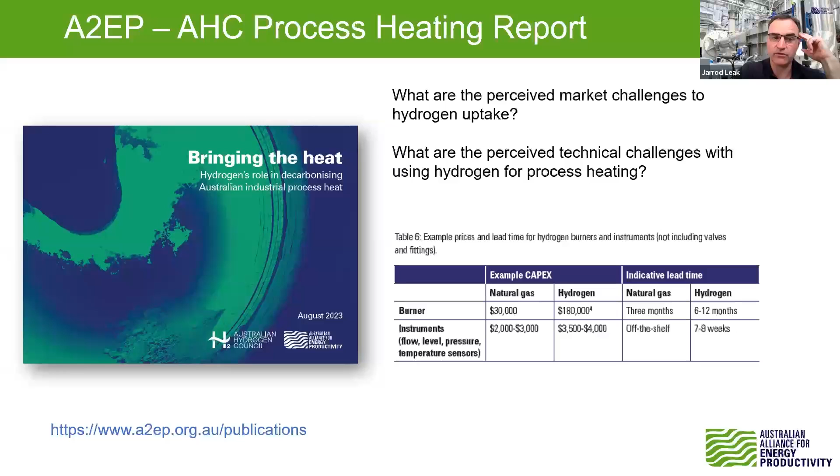One of the first things that came clear was that the costs for using and burning hydrogen are certainly higher with the equipment. In some cases, for some instrumentation, it literally needs to be gold plated to stop that hydrogen leaking into or escaping from the pipework. So there's certainly much higher costs coming when you need to look at burning hydrogen. We've summarised a few of the different extra costs for like-for-like cases - that's just one of the many tables and insights you'll find in that report. You can download that report from our publications area on our website.

In terms of an overarching theme that continued to come through, most of industry is preferring electrification and/or biomass or biogas.

Hydrogen is not coming into much strategic planning, largely due to the uncertainty of supply and cost. On the supply side, how is that going to be stored and produced all year round? On the cost side, while the long-term guide is maybe $2 per kilo, what is that in the short term, and how much is that going to fluctuate? There's a lot of uncertainty over that cost. So that was the generic picture we got back in terms of feedback.

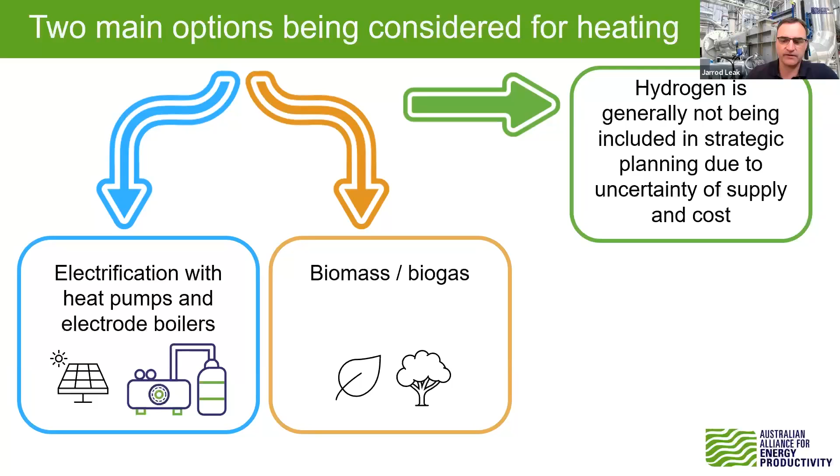This is an extract from the report breaking down the various industries we investigated. If you look at the middle column for hydrogen where it's coloured, you'll see there were not a lot of green lights for hydrogen. Certainly the alumina industry is reviewing that in Queensland to look at using hydrogen for their calcining processes. In some cases, bricks and ceramics have said they're investigating it as one of the possible routes to decarbonise their process heating. Not a lot of others are giving it the due consideration and R&D it probably needs right now, so you see most of the green is for bioenergy and electrification.

There's still quite a few orange spots where R&D is needed, and we definitely saw that through a lot of different areas, like in cement, where they're themselves wondering how they're going to handle this big, long, clear flame that doesn't have the same sort of thermal properties as a natural gas flame.

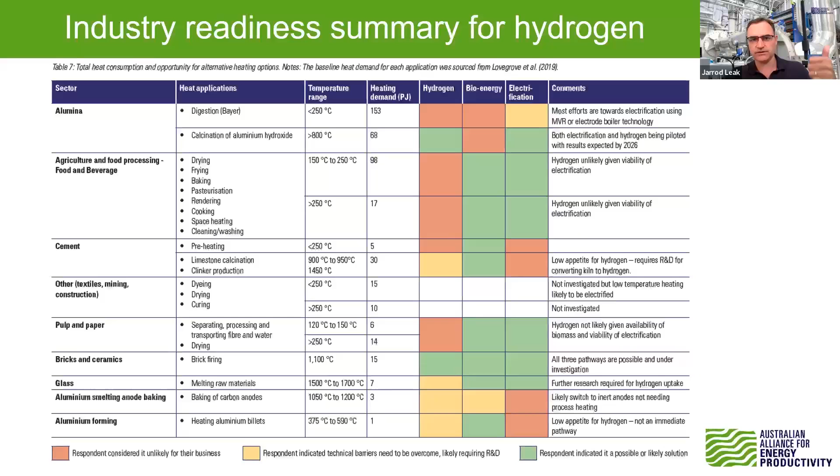So since we've done a lot now in the last 12, 18 months on process heat across electrification, bioenergy and hydrogen, it's led us to a little bit of a model here on where we see things going. Most people online will be energy types and therefore love a Sankey, so this is a quick Sankey we've drawn up utilising data on the left-hand side from the ITP report and from 2019.

Then saying, right, what are some likely trajectories and future heating mixes there? We see, whilst a percentage is achievable with efficiency, most of the work and the heavy lifting, we think, for decarbonising heat over the next 10 to 20 years is certainly in electrification. Heat pumps and MVRs making up a reasonable chunk, and that's why we did the MVR webinar just recently. But also electrode boilers and other things taking up a large chunk of the potential there for heating.

Bioenergy, with current trajectories, we don't see it moving around that much. We've got bagasse being the largest part there, but biogas and biomethane doesn't have the best regulation support - not the greatest trajectory for a big uptake at the moment.

The RACE report that we were involved with identified potential for 350 petajoules of new biomethane and biogas coming into the market, but yet the current regulatory environment, we're saying only 50 or so petajoules being used for process heat at the moment. Hydrogen still a big chunk there, even though our report didn't point towards a lot, but the likes of ammonia and chemicals are certainly likely to be taking up a fair chunk of hydrogen, and certainly even more if we start exporting green iron in the country.

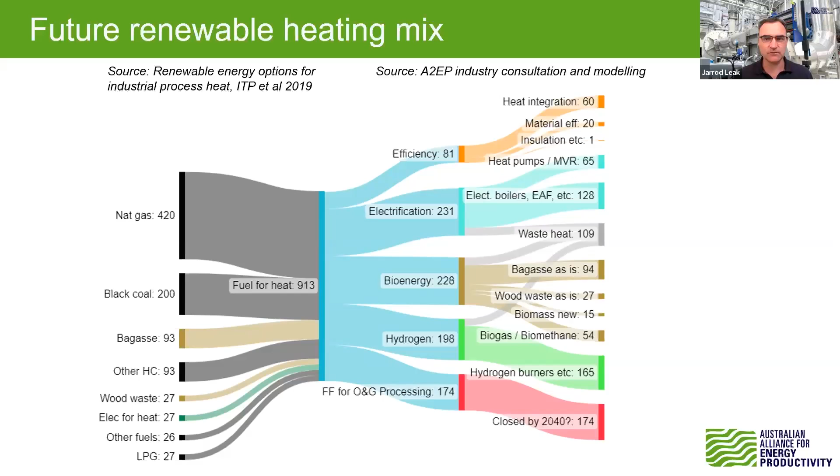We conducted the Australian Heat Pump Roundtable at the end of July, and it was really well subscribed. We invited 30 people and ended up with about 40, so that was nice to have. It was an excellent mix of various governments and government organisations. We had ARENA there, federal and state governments, and some fantastic sponsorship from Mayekawa, RACE for 2030, and AGL to make it happen. A really good picture of what's going on with heat pumps at the moment.

We gave everybody an update of what we see happening in terms of research, and there was a really good discussion around some key issues there.

I thought I'd share a little bit of what came out of that roundtable. We polled the audience on some of the key issues, what they thought were the key issues affecting everybody at the moment, and what would have the biggest impact. These were the main ones, as voted by the participants.

So cross-cutting issues, being standards, regulations, and general awareness, and things like nomenclature - the way we're talking about heat pumps - came up as a really popular one, and we think we're going to do some more work in that area. Followed by optimization of heat pumps, which really comes down to understanding how to best install them.

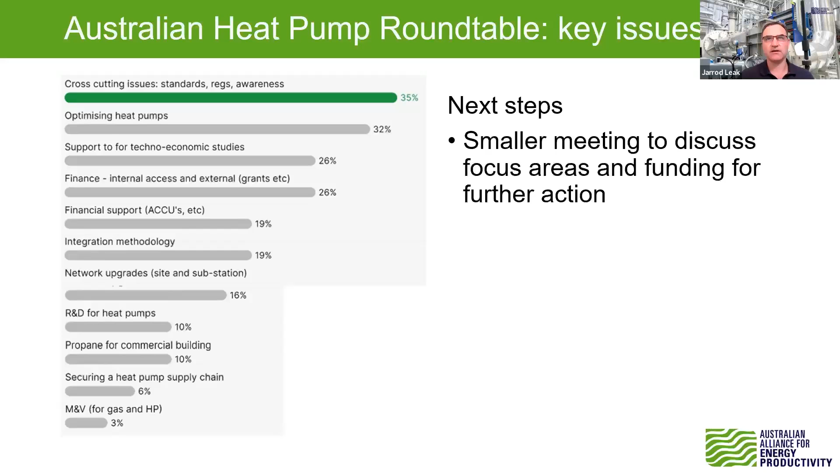That's plenty from me. Let me hand over now to Simon Ray. Simon is a project manager for A2EP for several years now and has run a lot of renewable heating and different modelling projects for us, and done a lot with heat pumps and the like.

We've asked Simon to spearhead this work with the federal government here. It's absolutely crucial with understanding where gas and coal is being used for process heating, an absolutely essential foundation for further planning. Simon, could you take us through that project there?

Thanks, Jarrod. Hello, everyone. So this project is largely based on the success of the Regional Heat Demand Database project by our colleagues over the ditch, the New Zealand Energy Efficiency and Conservation Authority. And in the Australian context, we're working with the Federal Department of Climate Change, Energy, Environment and Water, and they've engaged UTS and A2EP to deliver the first Australian accessible, anonymised and open data set about heat demand.

So it really is an exciting project to be part of, and I think something that will spur a lot of work down the line. Very happy to contribute to this exciting research. The database will map and quantify existing process heat demands to help enable process heat decarbonisation through better planning, fuel switching, and ultimately decision making.

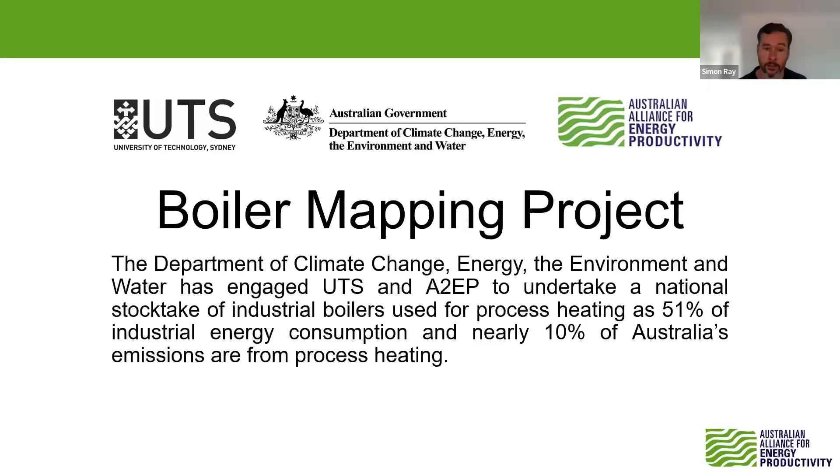So really, that's the summary of the project. At this early stage, we are very early in the development of this project. We're still reaching out to sites. So please feel free to contact me if you have a site that uses, say, greater than 50,000 gigajoules per annum of gas for process heat, or potentially you're a consultant that works with sites that has that kind of level of consumption. Please let me know if you have any comments or questions. I'll be happy to take any.

Thank you, Simon. And your time frame - this project you're putting together, when are we looking at getting something to the federal government, and a bit of a report out there to help others understand what's going on? What's our time frame here?

We're hoping by the end of the year, Jarrod. So it is initial steps, just gathering that kind of list of potential participants, so the companies who have this kind of information - and obviously we respect that information has high privacy concerns with various companies, at the big end of town in terms of their consumption. So we have spent several months developing privacy and data security protocols and management that we've enacted from the very start. Just to emphasize, as well as the publicly available database I mentioned, the high level data will be highly secured and unpublicized. So hopefully that'll start coming in, and we'll be able to provide that report at the early stages of next year.

Good one. And there's a few different areas and people working on this. I will be attending an ARENA event, they call it an A Lab, on the 9th and 10th of October, talking about industrial electrification. And I think some of the data we'll be getting here, I'm sure they would love some of that already to start in their planning and understanding of industrial electrification. So I expect it to feed into lots of different departments and programs. Really important piece of work there, Simon.

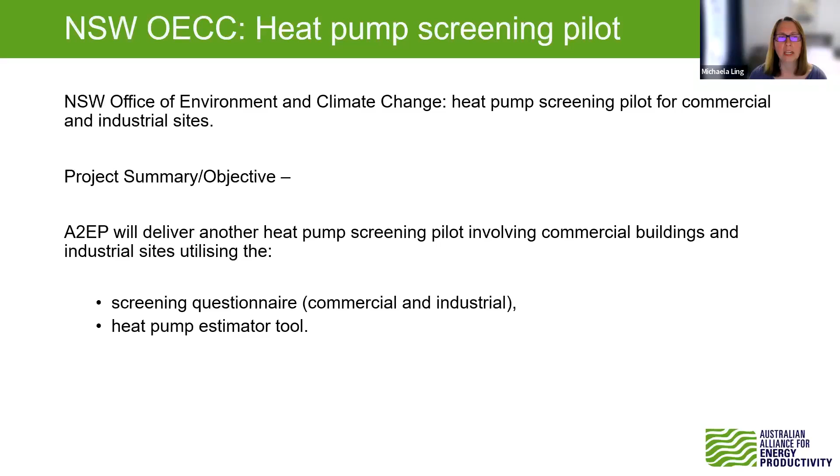Next slide, Jarrod. So basically these tools - a few of you online may have already been involved in the previous pilot that we did, and there are other people on board that I have worked with on previous projects, so happy to get any input from you guys.

But basically the final tool will allow people to go in and, with information on a site such as their energy profile and their current gas use, put some information in and see if heat pumps is something that you should be looking at investing in or approaching to that feasibility study stage.

And this tool also has aspects that allow us to assess the competency of consultants doing the work, as well as the sites, just because it's very easy to have people deliver a feasibility report but maybe not have all the in-house capability to do so, and this is hopefully going to avoid that a little bit moving forward.

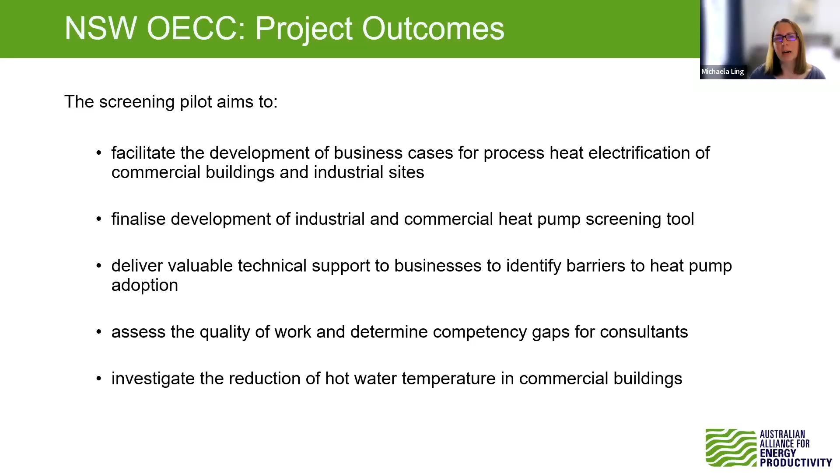And then, other than delivering these tools - basically a screening questionnaire and the heat pump estimator tool - there will also be the potential to do some testing on the reduction of hot water temperature in commercial buildings.

I've just got a slide on that, but basically we're very lucky - Brendan has joined us and has actually done this sort of testing already in his previous work experience. We're hopefully going to identify a site that will allow us to go in there and look at adjusting that hot water temperature and see if we can actually reduce it and still get the required results.

This again has a bit more development that will happen within Brendan's project with RACE for 2030. And I guess, if anyone's got any interest in being involved in doing the questionnaires and the testing, or has a site they would like to put up, please reach out to me.

Thanks, Michaela. And this HHW, heating hot water loop temperature reduction - I understand this was actually done a few years ago in Victoria. They did it as an energy efficiency type measure. I had a little bit of trouble getting all the details on that one, but it was run successfully.

But now we're essentially going to do something similar, looking to get people ready for a heat pump installation, because we know roughly every degree you reduce that heating hot water temperature gives you 2 to 3% improvement in efficiency. So if we can go from 80 degrees, where most operate, and get that down to 60 degrees or lower, then we'll see much better performance in the heat pumps that come in to replace them.

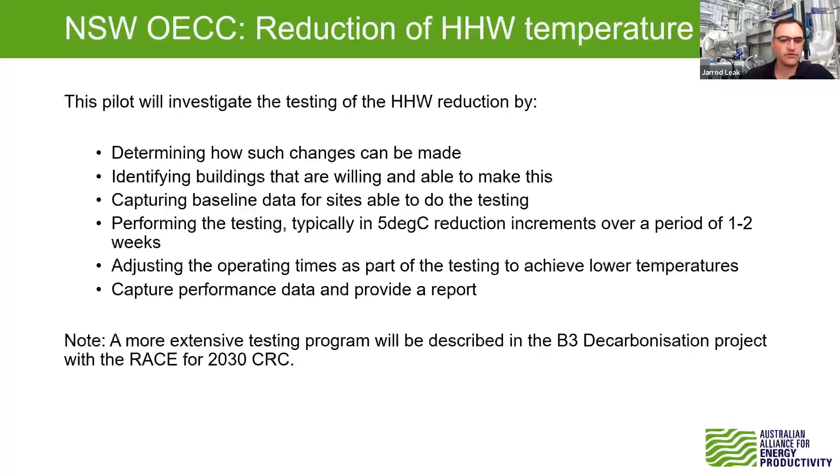Brendan, you've got a big piece of work on, and that's going to really complement what Michaela's doing. Would you like to take us through that piece of work? Sure, thanks Jarrod. Hi, everyone.

Jarrod mentioned this is quite a large project, so I've tried to be quite concise with the slide, so we just don't get too bored listening to my voice. Feel free to put questions in the chat or ask them as we go along if you get bored of listening to me partway through. This project is primarily focused on decarbonisation of heating, and I'm very pleased myself to have joined A2EP and be working with RACE, UTS and RMIT, and all the members and industry contributors I've spoken to so far to deliver what is quite a large piece of heat pump research. There are 6 key project deliverables, which I've put together as a project on a page for us to go through each step.

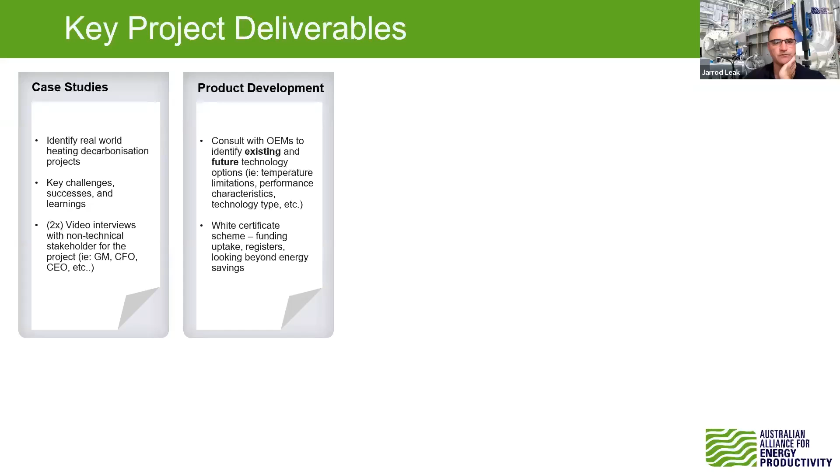Onto a nice tricky topic, refrigerants. So refrigerants is a bit of a mystery. For those that have never met me, I am a refrigeration mechanic by trade, so have been in and around refrigerants since I was 17, late 17, just under 18 years old. Why specific refrigerants are often chosen is often primarily an opinion, I think, in this industry.

And often, most of the time, I would say that opinion is based on years of experience. It's really up to who you find and your relationship with them, as to how good the refrigerant choice may be for a given project and how applicable it is. It's not always the case that people get good advice. Choosing the wrong refrigerant can make or break the success of a project, particularly in heating. If your operating characteristics don't match the load profile or the application, you could have a very real issue.

So A2EP are aiming to clearly identify the pros and cons of a given refrigerant, and identify a basic application guide that can be used by the industry in real world project scenarios. Hopefully the output of this is we can educate more people on the refrigerant they're choosing, why they're choosing it, and how that's going to impact their project. So this one is a bit of a scan of the market for what's out there, and also an application focused guide where we can provide some advice to the industry and end users of heat pumps.

So yeah, it seems to be a really dynamic space here, Brendan. A lot is up in the air. We see Europe heading more towards propane heat pumps. Maybe not so much Japan, they seem to be strong on R32 style heat pumps, but generally there's not a clear consensus that there's an easy change away from these high GWP refrigerants at the moment. So yeah, really important piece of work there, and I don't know how you're going to keep up with the fast moving pace there, Brendan. By the time you press publish on that one, you might be out of date.

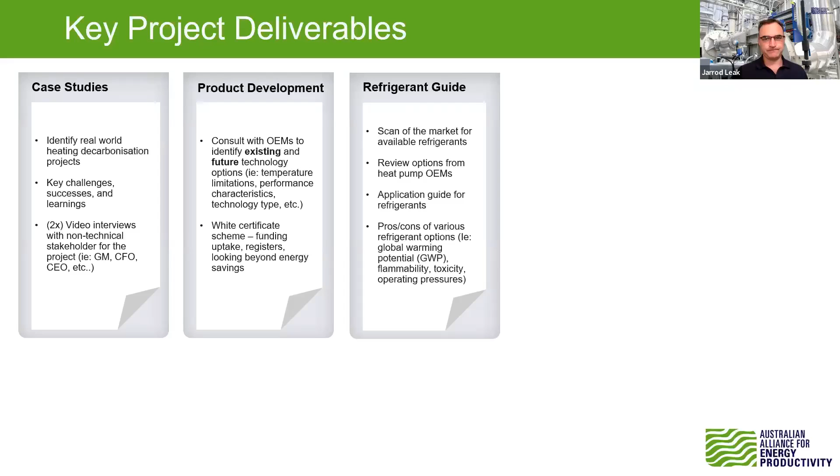So, yeah. And have you got your list of OEMs all sorted, all organised? We've got a call to action here for other OEMs to contact you for a bit of work there. Yeah, so a lot of the existing OEMs that we've gone to, or A2EP has gone to for previous studies, I've reached out there on contributing to the project. Any other OEMs that feel like they can add value, we'd love to have you as part of the project. I think the more the merrier in this one.

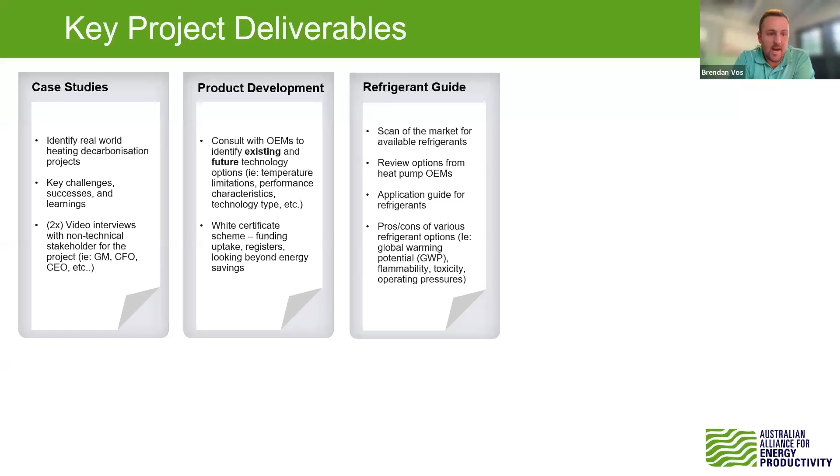I'd rather do more interviews with less time and more concise questions than do fewer interviews with longer periods of questions. So we'll cram as many in as we can in the time frame that we have, noting those interviews will probably be some time through October and November, maybe, and we'll probably take half an hour to 40 minutes of your time to do. Good one. Thanks, Brendan.

Another really cool topic, and one of my favorites, is data. I've been in the HVAC industry nearly 20 years, and I often hear people say we have heaps of data. But when you dig deeper, you often find that data may not be in the form it should be, or it may not be the right data to drive a decision-making process. So the aim is to clearly categorize methodologies for capturing data and using it in analysis, aligning that output to what's required to build a model of a heating system that would qualify for funding from white certificate programs.

There's a key link there, and further aligning what people are collecting as data and how they're using it to develop an efficient, robust heat pump design with appropriate technology and size, and using it to size thermal batteries and other cool things if you've got the right data. This is a very interesting topic—a lot of people have data but don't know what to do with it, or don't know what to log. Hopefully this section gives some very clear guidance.

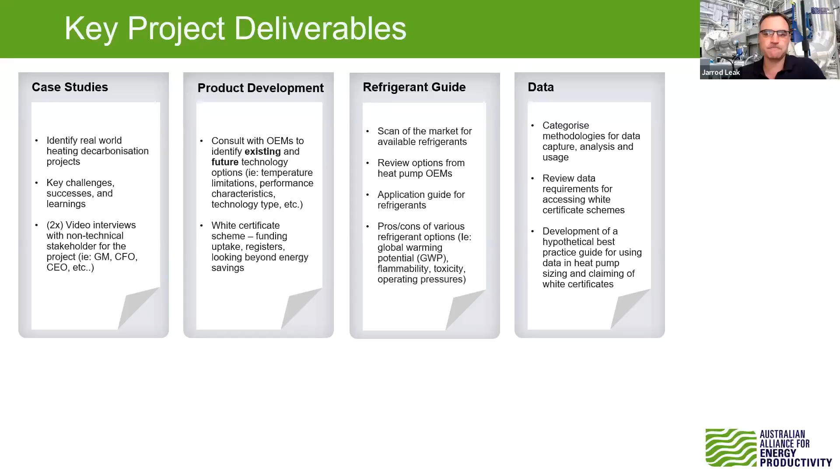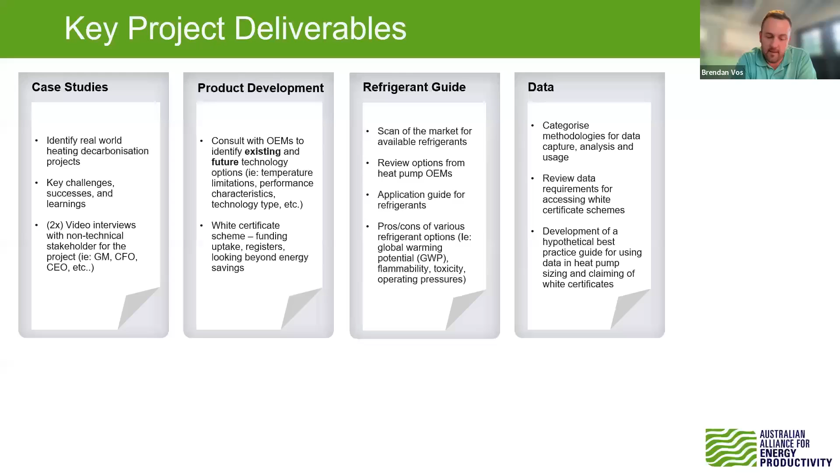Excellent. And some cool stuff happening in the IoT space there, Brendan. I think you'll be able to get that into this one as well, to try and reduce the cost of installing instruments and getting that data. Yeah, anything you can do to reduce the cost of metering is good. So we'll try to cover as much of that application as possible. There are some very good IoT solutions out there that are probably underrepresented in the market, so we'll see if we can bring some of them out as well.

Final section—well, there's still one more after this. This is the fun part of the project: the heat pump tool. A2EP has already published heatpumpestimator.com, a very interesting and cool tool. We're seeking to expand its functionality. Some ideas of what will go in there include more advanced calculations around emissions, white certificates, heating profiles, refrigerants, thermal batteries, and a more advanced economics module—some of those newly proposed features.

This work requires a large amount of input from both industry and from UTS and RMIT. I'm really interested to get that work split out amongst those parties and get this one started. The aim is to develop a calculation tool that represents industry standard, so if someone is a bit unsure of something they've received—maybe a design from somewhere, or someone's made a recommendation—they can quickly come in, type a minimal amount of information, and at least get a sense check on whether they're heading in the right direction.

Amongst all this other guidance about refrigerants, products, applications and data, hopefully this tool is another way for people to qualify what they're actually seeing, which is hard to do because you often just accept the design you get. So it's going to be tricky to put this one together. Another call to action: anyone who thinks they can add value to this tool and get features in there, feel free to reach out—we'd love to hear what you think would help.

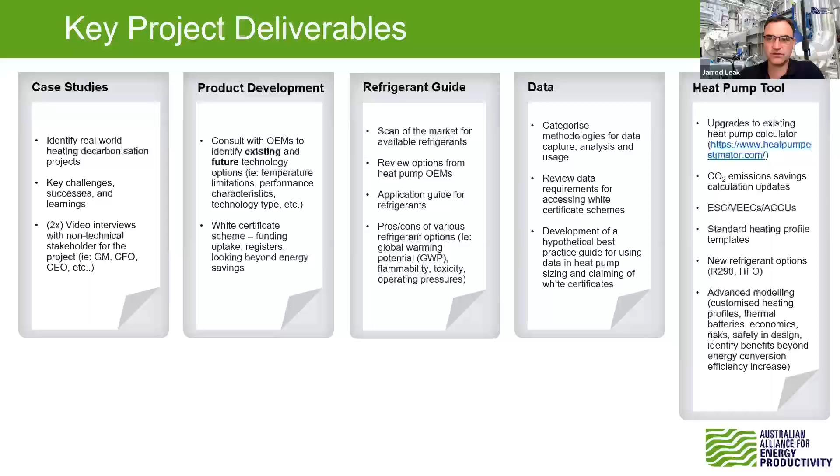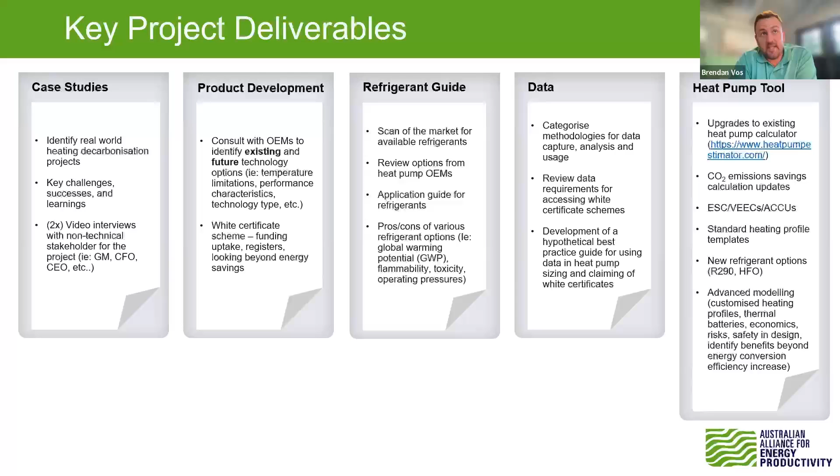The intention is to get people started and give them a nice little kickstart with easy numbers to start thinking about this, before leading into more detailed investigations, working with consultants, suppliers, and so on. This will hopefully give people a nice little kickstart and make it easy for them. Whilst it won't replace the consultant in the typical sense—it can't replace expert advice or a design—it's certainly capable of pointing you in the right direction, putting potentially difficult-to-understand information into a simple reference form.

The final piece is a bit of a combination of everything, and probably the biggest crossover with what Michaela mentioned earlier: determining the most economical and simplest transition pathway from a natural gas boiler to a heat pump for space heating. This is intended to help facility managers and building owners consider the impacts against a broader set of performance indicators for adopting a heat pump.

So there's a bit of guidance out there, but ultimately it's lacking on methods to identify what that pathway looks like, whether it be lowering a temperature, what temperature do we choose, why do we choose it, what are the key drivers, where are we spending money upgrading systems that we don't need to, what's the trade-off between CapEx and OpEx. So hopefully this particular roadmap will help get those temperatures right and match it to technology well.

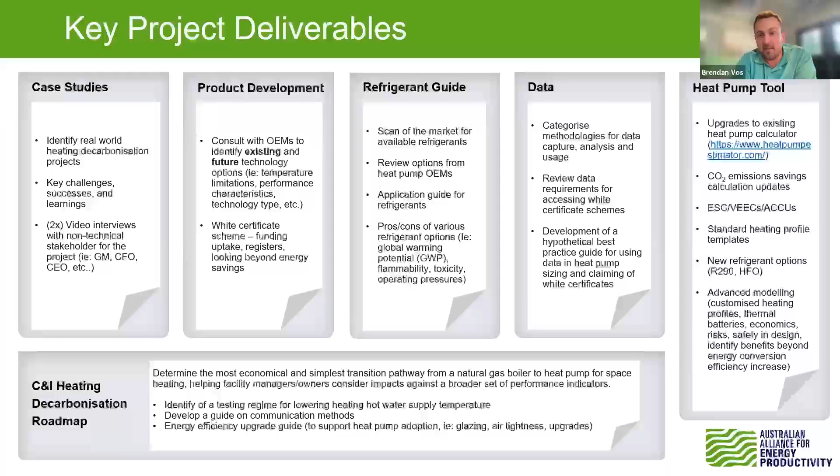But crucially, the roadmap will also attempt to focus attention on the potential that efficiency upgrades have to ease those costs. So if you're out there adding a whole bunch more energy consumption to your building, there are solutions like glazing, air tightness, equipment upgrades, valves, whatever it may be. If we can get the costs eased at a CapEx and OpEx level by considering those, this roadmap will aim to at least prompt people to consider that as we go.

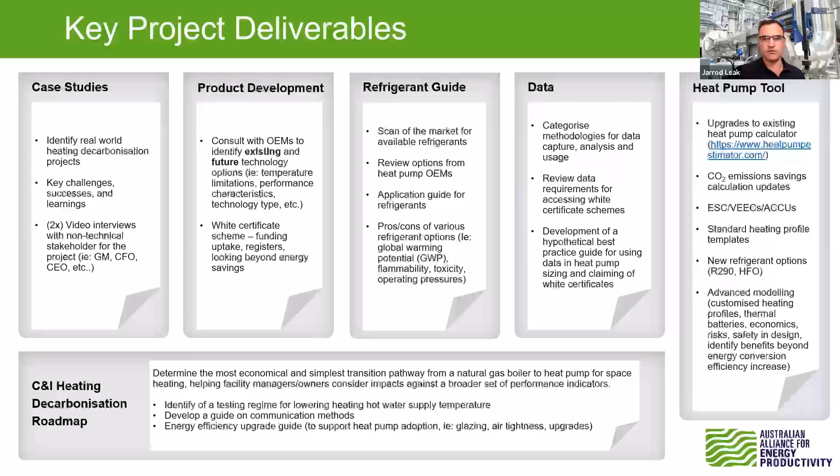And there's been work done in this in the past. GBCA has done some high level things, and the Better Building Partnership have done some flowcharts, but this will take it to the next level. Instead of hitting a dead end with some space concerns or electrical concerns, this should really open up a lot of thinking and say, no, this is not always a dead end, just that it's time to be more creative. So I think that's an excellent piece of work there for you, Brendan. And yeah, it really does tie in well with the work that Michaela's doing with the OECC. They're really complementary, so glad to be doing both.

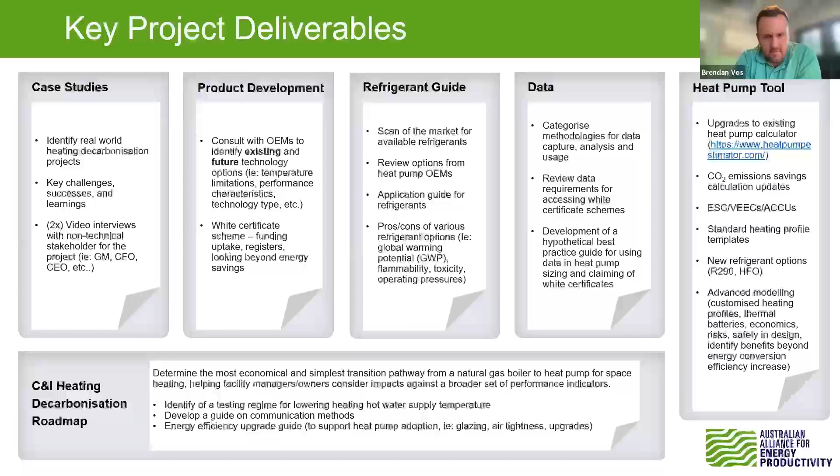Yeah. Sorry, go Brendan. So there's one more slide on the end, which is just a very quick summary, I guess, of all of this. Some ideal outcomes from this work, or at least what I saw as ideal outcomes anyway. There's many more than this, but I just tried to get a few in there.

Excellent, thank you Brendan. And we continue to see this every other day here at A2EP when end users, manufacturers, councils and things reach out to us with reports and studies. We think there's still a lot of missing holes where people aren't quite sure of where and how to collect the data and how to optimize and how to do these simulations. So this will all help people a lot.

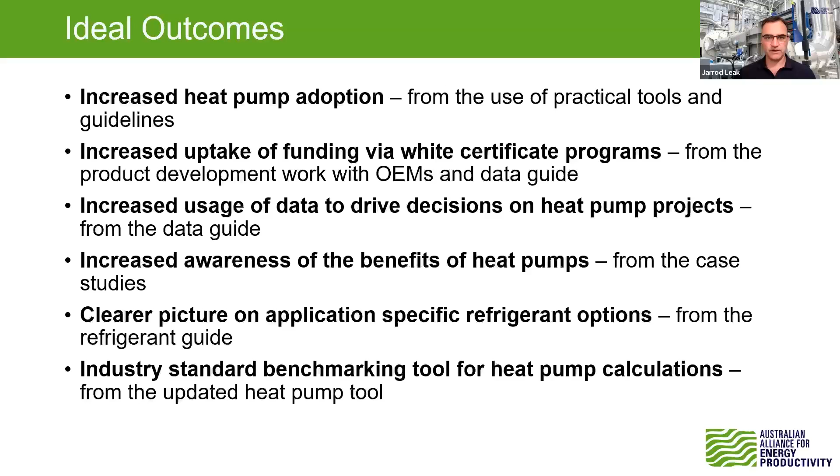And in terms of the OECC program, Satinder, I'll make sure that Michaela reaches out to you if she hasn't already, to get you involved in that screening, which hopefully leads to some further funding on studies. Done. Very good. Thank you, Brendan and team.

If there's any more questions, we've got 5 minutes. I'm just going through the one there. I've got a question on thermal batteries, and Rachel, I'll send you something directly on that one, a summary that I've prepared for somebody else in the last few weeks of what's happening in that sort of market, the thermal battery market. So I'll send that directly to you, Rachel. And we've got to answer that question there for Satinder.

So all done. Let me just check on the chat. No, nothing further there, apart from, yes, we've had a nice report flagged on domestic hot water units, looking at load flexibility for domestic hot water units. John heard a question on that one earlier. Might be a good report to take a look at. Some really good things happening there from UTS and ICF. Excellent.

Okay, I'll come back to the questions right at the very end, but meanwhile, let me just give you a quick update on some other activities we are doing.

We have a webinar on the 19th of October. This is to really support the New South Wales Government grants program, which is opening next month in October, for supporting of metering planning and metering hardware. Details will be released in the next few weeks, and we'll come forward with a webinar to support that, to let you know some ideas of where and how to do the metering planning, some ideas on the latest hardware. I think we've got Endress and Hauser telling us a bit what's going on there, and a little bit on some IoT devices or Industry 4.0 solutions from the company Reliability, who will take us through the latest there. So give you some ideas of what to spend that grant funding on. Only New South Wales for that one though.

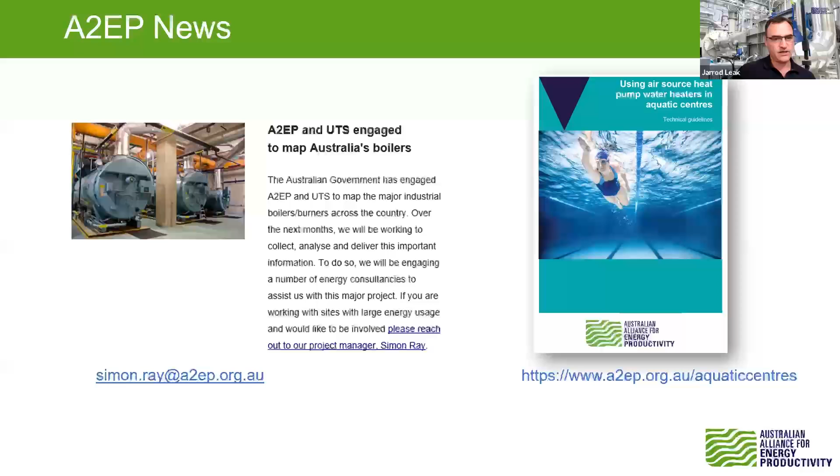And final piece of news there is, I think we've got this one, to map the boilers in Australia. So that one's all done, Simon's taken us through that one.